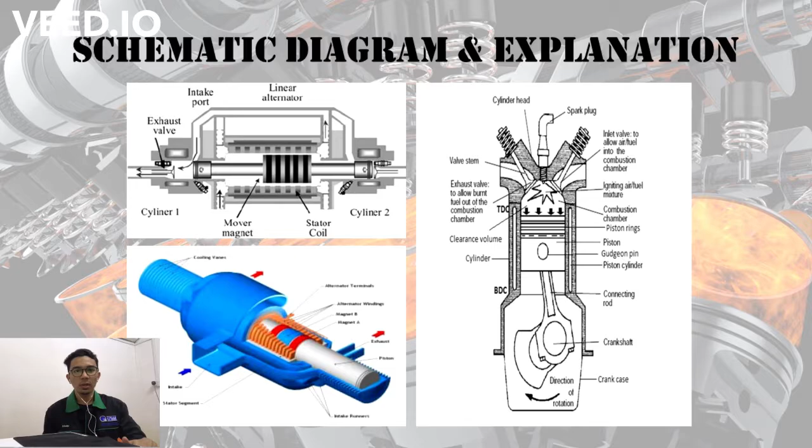The alternator component controls the piston motion and thus the extent of cylinder gas compression by efficiently managing the piston kinetic energy through each stroke. So compression of the fuel and air mixture is achieved initially, and as a result, a mechanically simple variable compression ratio design is possible with sophisticated electronic control.

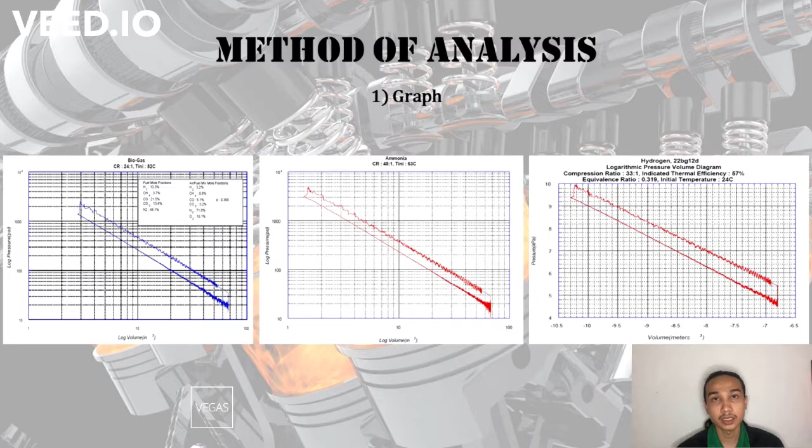Now, I will talk about the method of analysis. The method of analysis is divided into two parts, which are the graph and the equation. The graph has been sketched by referring to the data collected during the experiment. Three types of gas have been used for the internal combustion, which are ammonia, biogas and hydrogen. Next we will talk about the equation.

The equation used is the equation to find the internal energy, which is U. Next, the equation used for the heat addition and heat rejection during the combustion. The last one is the equation used for the thermal efficiency, which is equal to 1 minus Q in over Q out.

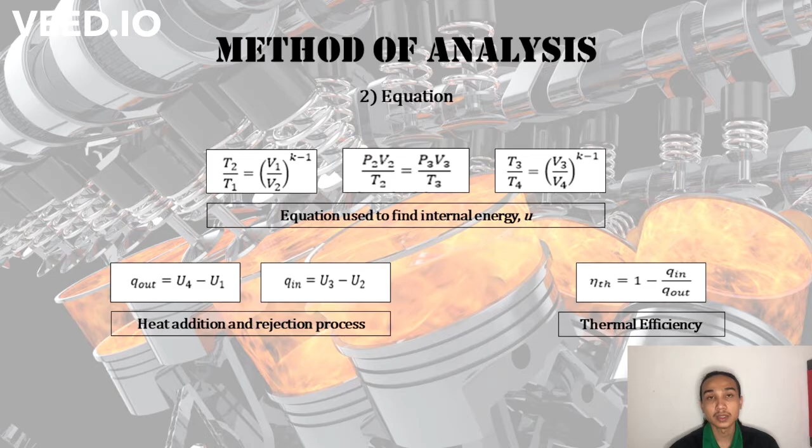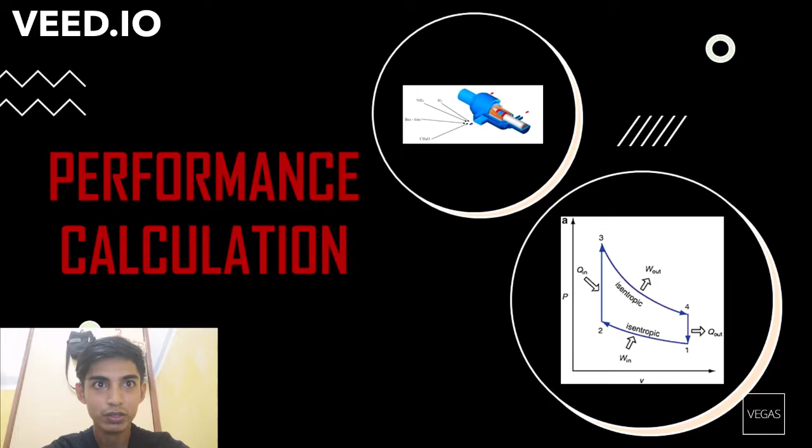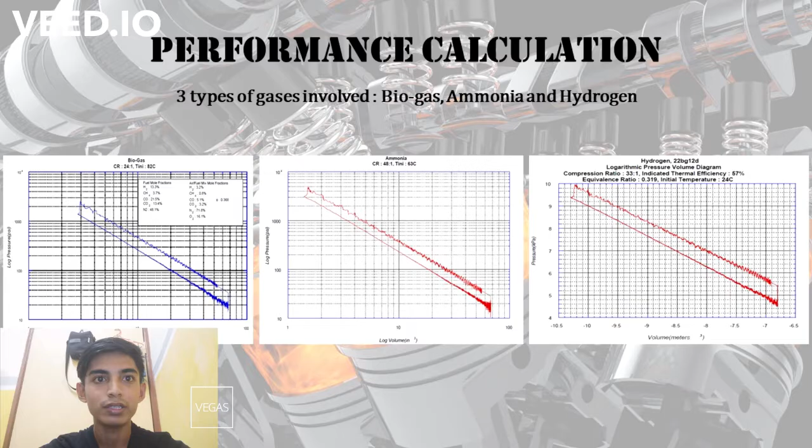In this project, three different types of gases were involved, which are biogas, ammonia and hydrogen gas. The Otto cycle was selected in order to run this experiment. Each experiment has a different initial temperature and compression ratio. In this section, we will only focus on the hydrogen gas internal combustion calculation. This experiment was carried out using a single-stroke rapid compression machine.

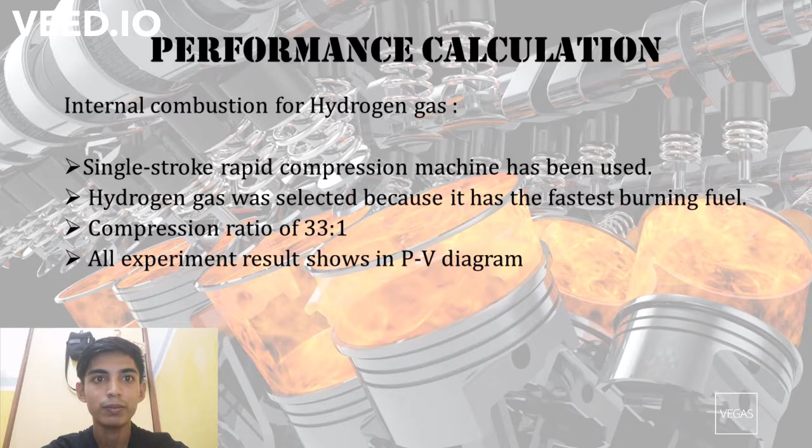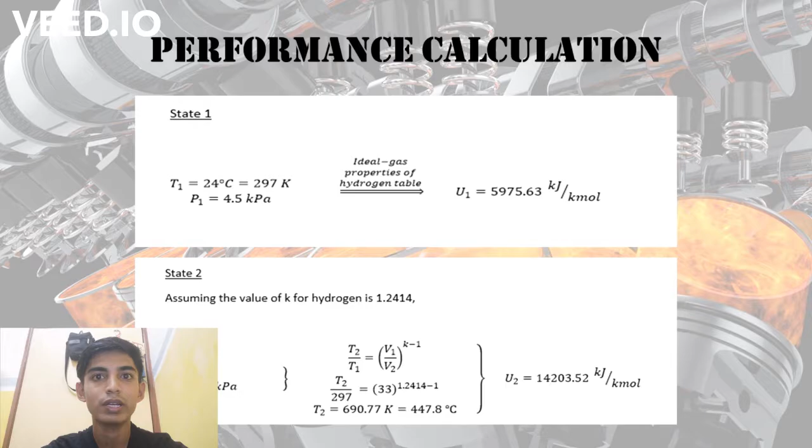The compression ratio used is 33:1 with an initial temperature of 24 degrees Celsius. First, we must find the internal energy of each state to calculate the efficiency of the cycle based on the data recorded in the PV diagram. For state 1, we can directly get the internal energy by referring to the ideal gas properties of hydrogen table. At state 2, we can use the formula with the standard air assumption for an isentropic process to find the temperature at state 2, then get the internal energy value.

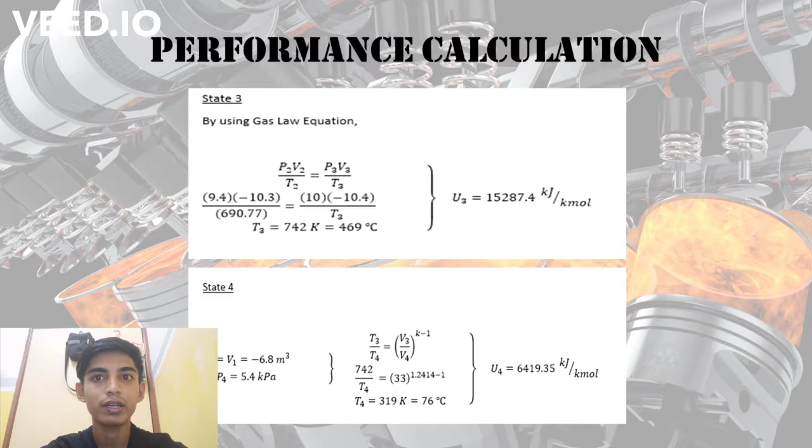To find the temperature at state 3 and 4, we will use the gas law equation and the standard air assumption equation respectively. After we have found the internal energy for each state, we can easily find the amount of heat addition and heat removal of this Otto cycle.

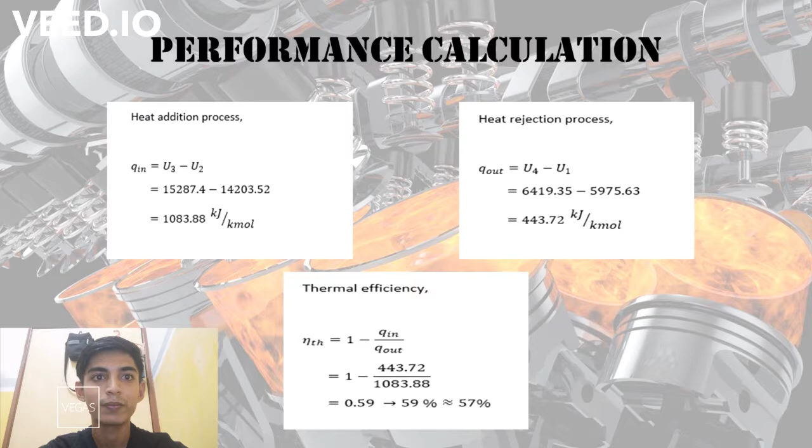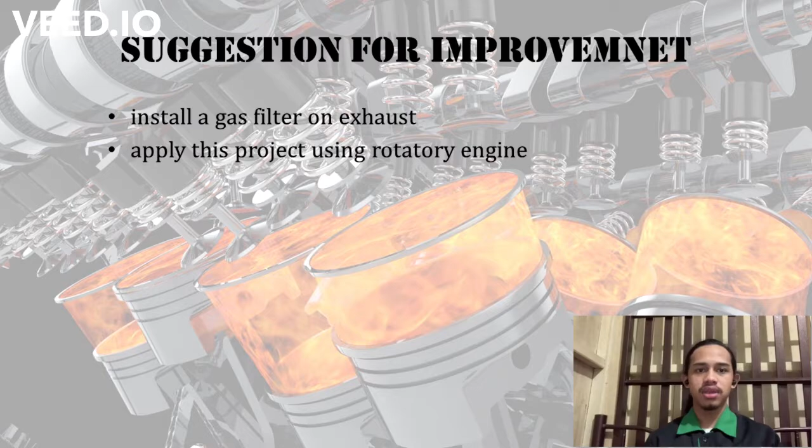Lastly, as a conclusion, the research is very useful to develop because it can help the environment reduce the problem of pollution that is happening now and into the future. Because now our world has been much affected by our technologies, especially those that are not environmentally friendly. This causes various pollution problems to increase statistically every day, like air, water and noise pollution.